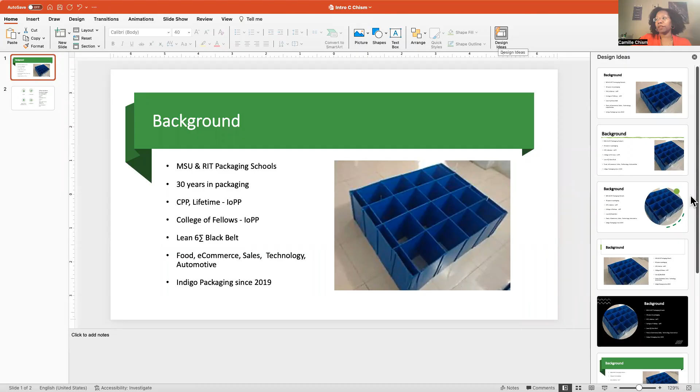You will see on my screen a little bit about my background. I want to introduce myself to you all. I went to Michigan State for my undergrad and also went to RIT for packaging, and I have over 30 years of experience in the packaging industry. I've worked in food, pharma, distribution, sales, computers, automotive, a little bit of everything. I am certified with IOPP as a certified packaging professional. I was inducted into the College of Fellows with Institute of Packaging Professionals, so I hope you all are involved with that. I have done things like receive my Lean Six Sigma Black Belt, value stream mapping, things like that related to automotive packaging. And I own my own packaging firm, so I work a lot with automotive. So this is perfect. I am looking forward to sharing all of my experience with you and sharing some of the best practices for automotive packaging.

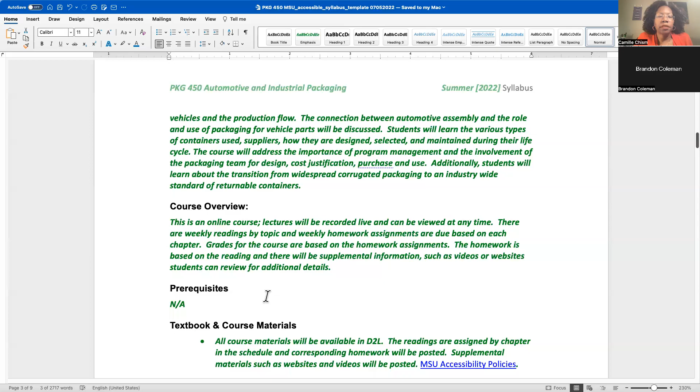The homework is based on the reading assignment, so the chapters that you have that are posted in D2L are what the homework is based on.

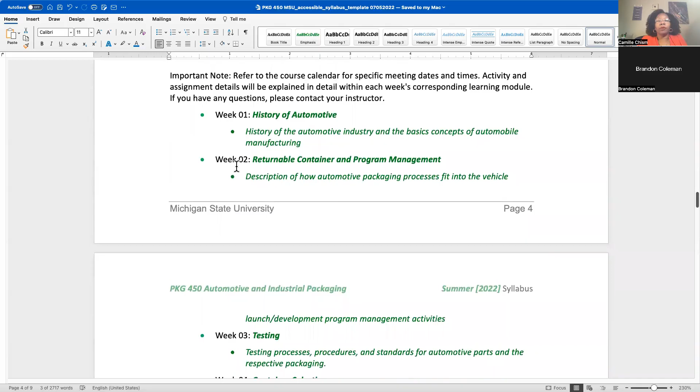As far as the schedule, it's going to go week by week, each chapter being the next week. So the first week, we're talking a little bit about the history and background of automotive.

Next week, we're going to dig into returnable containers and program management, and how packaging ties into the vehicle launch process. The following week, we'll talk about the importance of testing and the role testing plays in packaging design.

And even part approval, because the whole process of approving parts usually has, at the very least, a checkbox somewhere that says packaging has been completed and approved.

So you want to make sure your packaging has been designed, reviewed, tested, and approved before the quality team comes by and does that check mark, because once that happens, you may be stuck with the packaging and then you're fighting fires for years on a specific pack.

Week 4, we're going to talk about container selection, understanding for different vehicle parts what type of protection is needed, and then what some of those traditional packs are in automotive for those parts. And then there are ways to estimate the size of the pack, what's the best size to use. Are you going to ship something in a bulk pack like this, or in a tray that holds parts? Are you going to use an expendable pallet that you can get rid of, or use a returnable pallet? So those are some of the things we'll talk about.

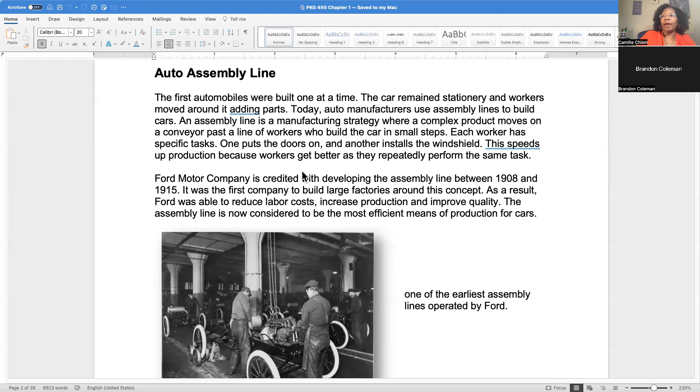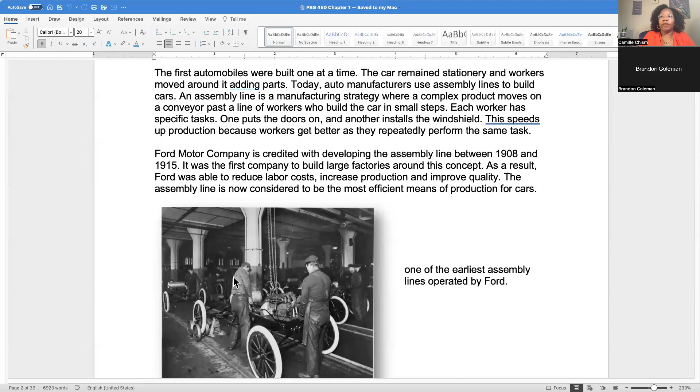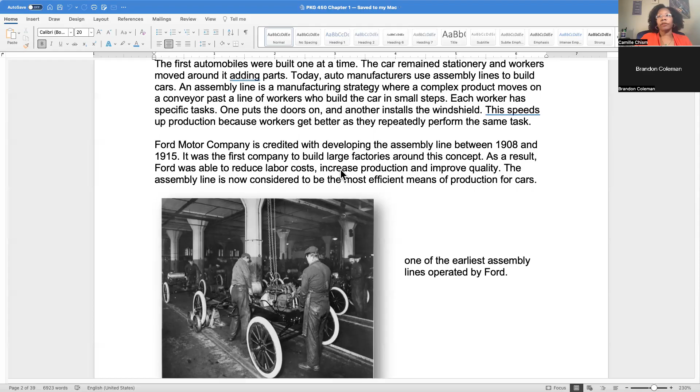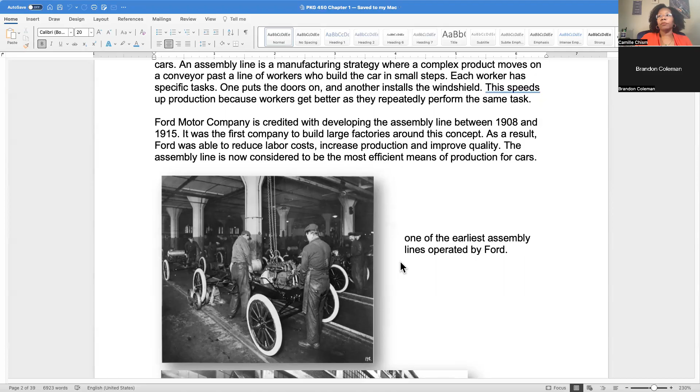Whereas before, if you had something where people were building that, they'd have to go get the windshield, put it on, put each window or each door on separately. You'll see this line here - it looks old-fashioned, but this was actually the beginning of an example of where Ford started to automate the line, move the vehicle down the line, and have people specializing in what they're doing. The Ford company is credited with this. This was a major, revolutionary change in automotive, and not just automotive - other modes of manufacturing and other industries adopted the same process. Rather than having a workshop, they turned things into an assembly line with stations to build, and the product or part moved through that manufacturing process versus building one thing at a time in one spot. So that was revolutionary, not just to automotive, but to manufacturing. I'd say it was a new step in the Industrial Revolution that helped move things along even more. Okay, here's an example - I think all these pictures are from the Rouge plant in Dearborn.

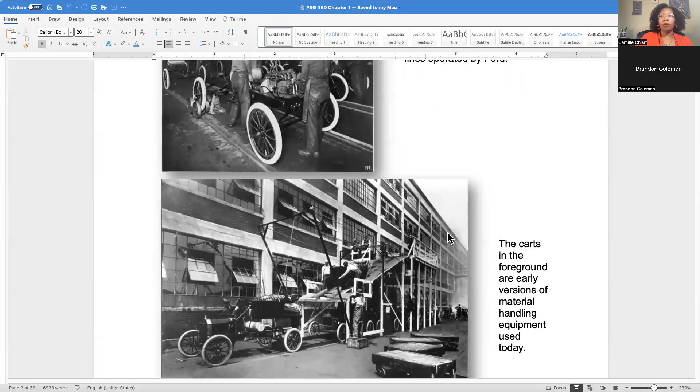So you can see this picture, very old, but you can see the vehicle coming out. This looks like maybe a Model T - I think it's a Model T. This was one of the first vehicle lines that Ford built, the Model T line. But you'll see over here that these carts don't really look that different from what you see in the manufacturing processes today in automotive.

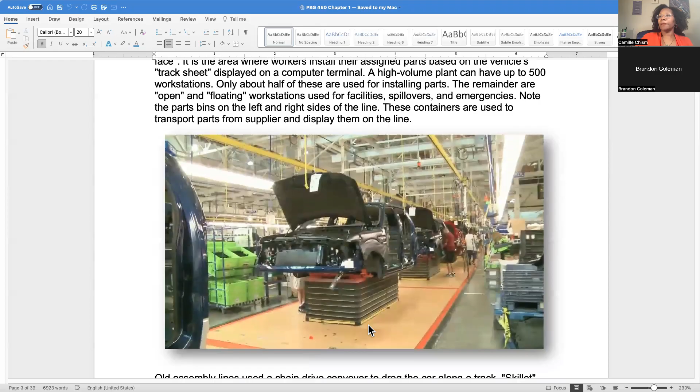Okay, so here's a modern assembly line. While you don't see these carts here this close, I'll tell you they're back here outside of the line of sight. One of the big changes you see now is that all the packaging is right at the line so the operator can reach it. We'll talk about that later.

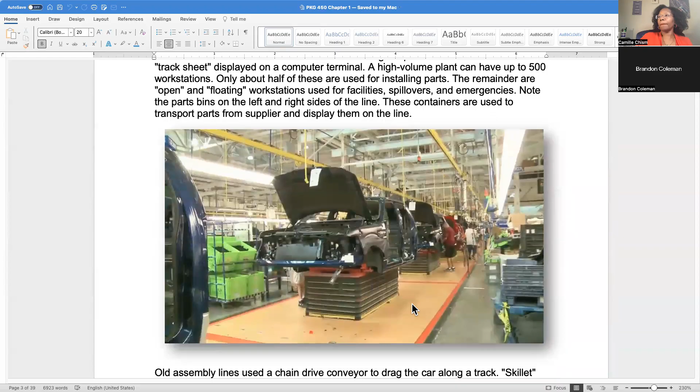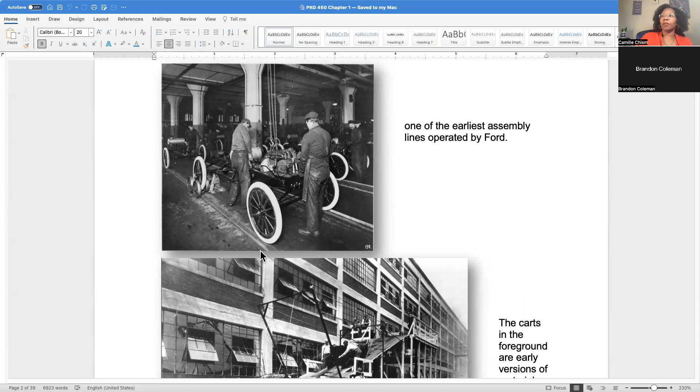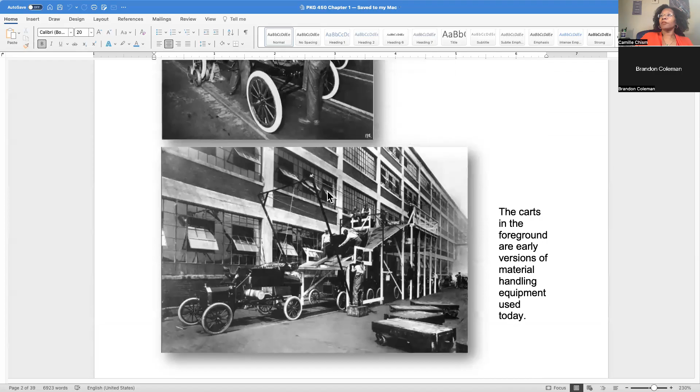So you'll see here in these two lines, the people are standing around and then they push the vehicle forward. You can see the cars on a roller system and they can roll it through here, and same thing at the end of the line - they're bringing it off a ramp. So they're basically working from the floor. But you'll notice now the newer lines, everything's on a plate. So if there's something wrong with this vehicle, depending on the manufacturer and the line, in some areas they could take this whole plate out and move it out if there's an issue, or they can just take the vehicle out and keep everything else moving.

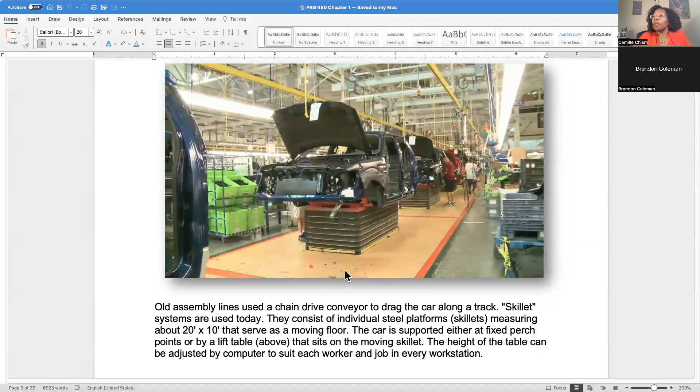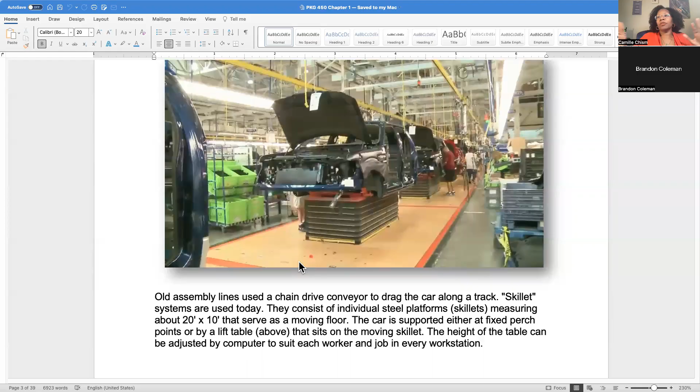But the old lines had some kind of chain, like a conveyor system, that would pull the car along. Now this system is called a skillet - it's like the plate, where they can take that whole 20-foot by 10-foot plate out, or just move and do all the work on that in that one cell.

And we'll talk later about material handling equipment. This one is used for cars, but depending on the station, it can lift up or down. So if someone's working on something like the sunroof, that material handling equipment will move down so the operator can get on top of the car. But if they're installing something lower, like a floorboard, or something underneath or at the base, that material handling system will lift up and then they can install from the bottom. The whole goal is to keep the operator standing pretty much in the very similar position.

They're not taking a lot of steps, because the more steps they take, the longer and more time it cuts out of their day, and they can do less work. So the whole process is to keep them standing in the same position, and they're not really moving a whole lot. That's why it's important.

They can move the car up and down, and you can see the packaging in the background that they can actually pull those parts out. At this station, the vehicle's up relatively high, and you'll see the bins, those bright green bins in the background, are also pretty high, which means the operator is going to be reaching for them. It's very easy for them to just reach and grab, and they're not struggling or straining - not bending down, not climbing up something. Pretty much everything's all at the same level.

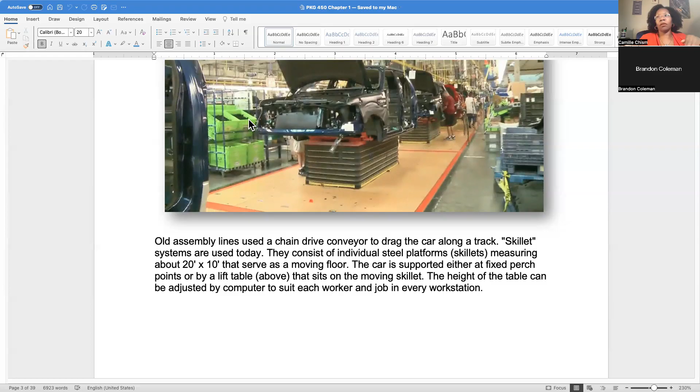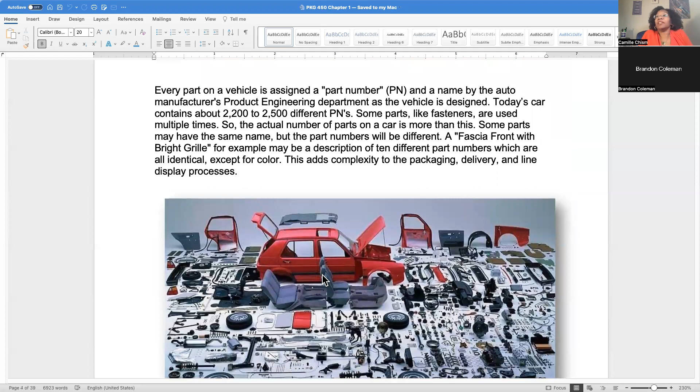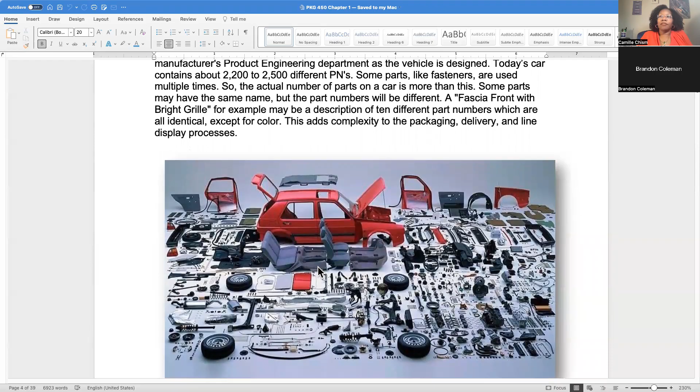Okay, this is interesting. If you were to take a vehicle apart, you would see a couple thousand parts for every single vehicle. I've worked in automotive seating, and for these seats you're going to have anywhere between 300 and 500 parts alone just for the seat. I worked for an engine plant, and they had hundreds of parts for the engine easily. So you can just see how many parts there are, and that includes every single part.

Like here, you can see these are fasteners and washers. Every screw, everything is counted and used and has a part number. You could use the same screw, same supplier, but the screw or fastener used for the steering wheel may have a different part number. That's something to keep in mind, because the part number can affect the packaging even if it's the same part, since the part number may be driven by a different quantity. So here you might be using 8 of these fasteners, here you might only be using 2, and over here you might be using 20. That's going to affect the type of packaging you select for that part.

Another thing to look out for: you might have 10 part numbers, but the color's different. So with things like seating, doors, cup holders, armrests, those might all be different colors. Or you might have what's called a left-hand part or a right-hand part, like a left-hand door handle and a right-hand door handle. They look exactly the same, except they're mirror images of each other.

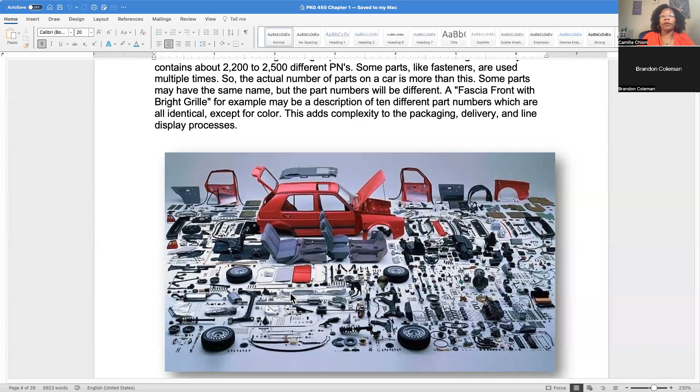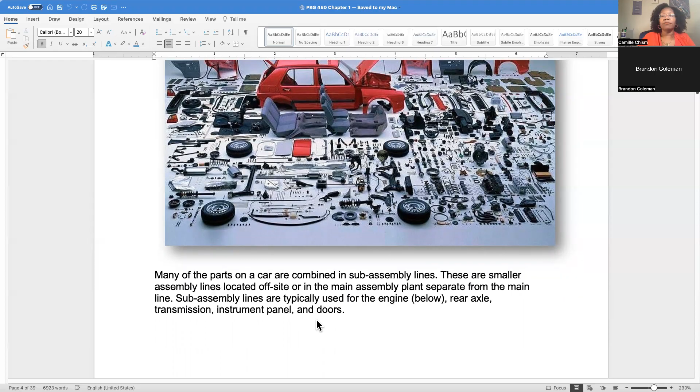You have to be aware of that too. You might have something that's low use - let's say you have a yellow door, a yellow car. You're not going to sell that many yellow cars, but if they sell that car in red, you might sell like 1,000 times more. That's going to impact the type of packaging you select for those. But it also gets tied into the room that's allocated on a production line, so there are a lot of different things to take into consideration.

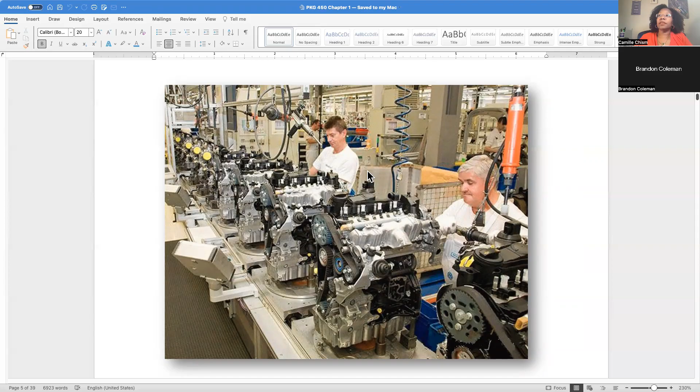Here you can see another example of the packaging line side. So you'll hear comments like line side packaging - packaging that is made to fit right near the operator when they work, so that they don't have to go walking and getting packaging. You'll actually hear about this a little bit in the video history.

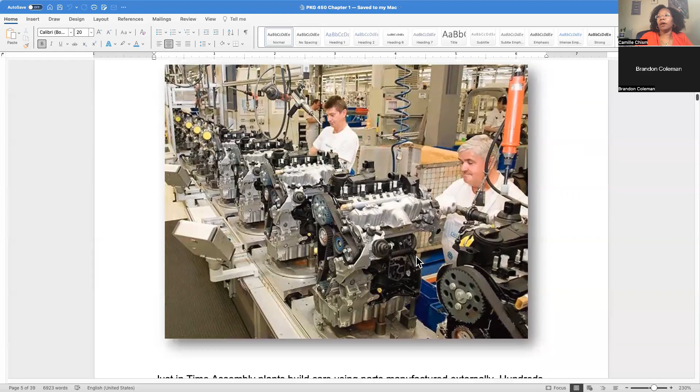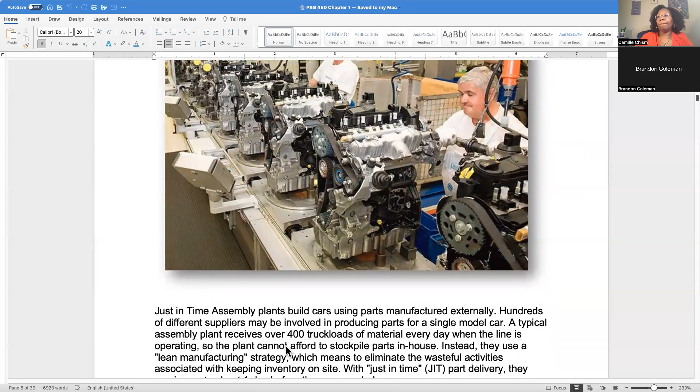This is an example of a just-in-time assembly plant, so we'll talk about that as well. These parts are ordered by - for example, when I worked in the seating plant, the plant was down the street, 5 minutes away from the OEM. The OEM, the original equipment manufacturer, would be what we consider the big three, like Chrysler, which is now Stellantis, Ford, General Motors, but it could be Toyota, Honda, any of the vehicle manufacturers. They're considered the OEM.

They could put in an order to their parts supplier depending on how they're setting up. If they're more of a lean manufacturing company following Toyota principles, they could get an order that says our customer down the road 5 minutes away wants 50 of the black doors today and only 5 of the yellow doors. Every day they've been ordering 50 black doors and 5 yellow doors, very low volume on the yellow. But then maybe they get an order from Yellow Cab to buy vehicles, so now they might decide to order 100 yellow doors instead of 5 or 10.

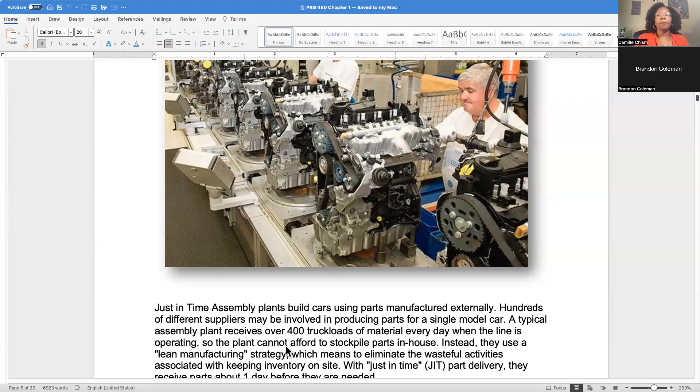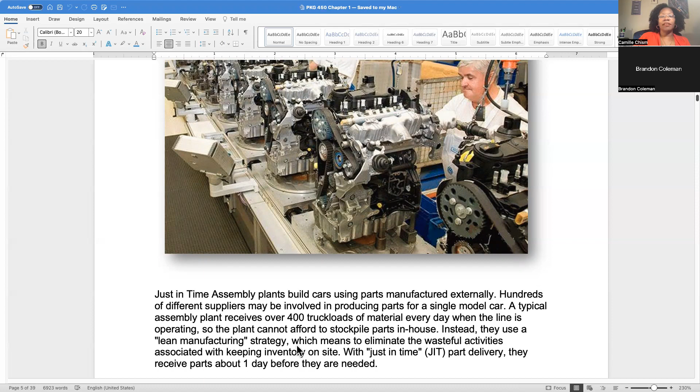So just-in-time is efficient for the OEMs and even the larger manufacturers, like the tier ones supplying to the OEMs. For larger companies like the tier ones or OEMs, just-in-time works well because they get what they need when they need it. The further down you go downstream for the suppliers, it becomes much more challenging for them.

In order to do that, here's where lean manufacturing comes in. You heard me mention steps and why it's important for the operator to stay in the same spot. In the automotive world, and you'll see this in other manufacturing facilities too, they may do a time study, but in lean manufacturing they may not do a time study.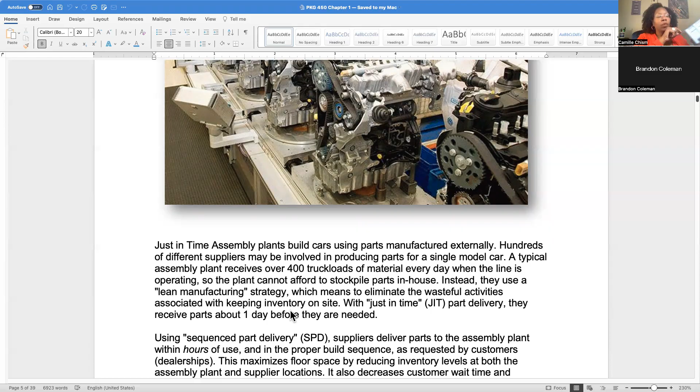They will do things like a spaghetti chart, or count the steps, and watch an operator all day. There are operators at the line pulling parts from the bin, standing in one place, able to pull those parts. But there may be one station where the operator has to walk around, get parts, and come back, and they see them doing this 20 times a day. That's a red flag that they need to implement more lean manufacturing processes to make it easier for the operator to get these parts.

The reason that's important is because if they get an order where they suddenly go from 5 to 100, they've got to have very streamlined processes so they can switch without focusing on picking things up and walking down the aisle to get parts. They'll be set up so that once they've switched over to yellow, the operators and the people delivering to them get a signal showing them they need to go get yellow parts right now.

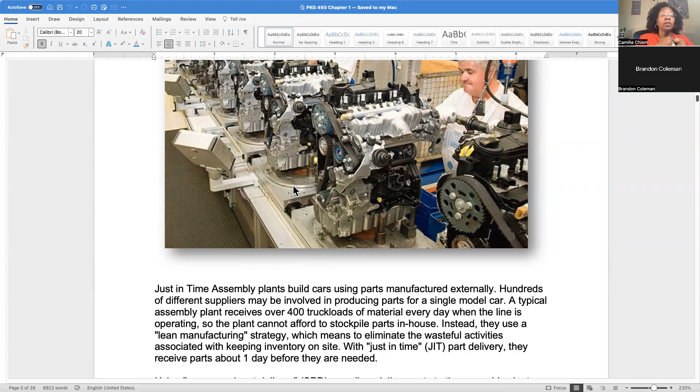So right here, where I was showing you this monitor, this could be telling them how many parts they've done. But if there's a very quick switchover for just-in-time from the black doors to the yellow doors, they might get a notification on there. So they're not going to build 10 more black doors — they're going to stop, and they should be able to turn around and grab their part, or it should be right at the line.

You'll see right here, this looks like some blue bins — these bins might hold parts. So if they're changing something, there will be people assigned to deliver parts on time. If they get that just-in-time order change, technically the operators building the parts shouldn't have to stop what they're doing. Those parts should be coming right to the line in the right packaging, and they can just continue to work. The next part they pull should be the right part, so it eliminates a lot of that delay.

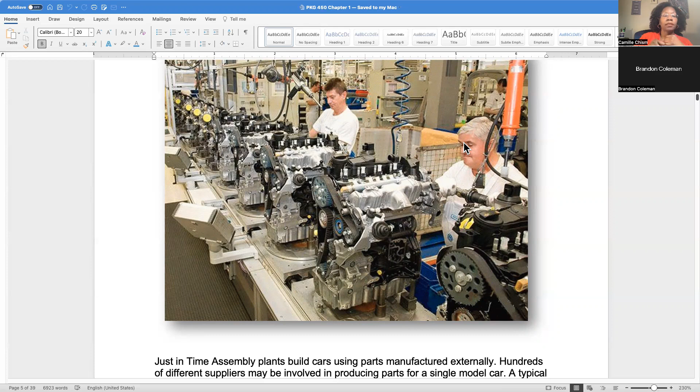Their job is to install the part on the door or the engine or whatever that part is — that's their job. And there are other people whose role is to make sure the right part is there at the right time. That's part of where they talk about eliminating wasteful activities with just-in-time delivery. Traditionally, we talk about receiving parts about a day before they're needed.

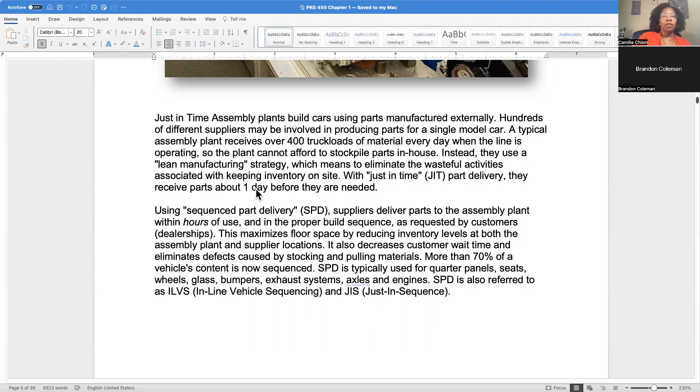Some of the OEMs are very demanding, and they might give what's called a signal or a change in order an hour, 2 or 3 hours ahead of when they need it. So in general, they try to have a day's worth of parts in before, so they can accommodate changes, but some customers are very demanding. You have to understand what the suppliers require in automotive. When I worked for seats, some companies were fine with having a day's worth of parts ahead of time, some needed 5 days ahead, and some needed to be able to switch up an hour ahead of time. So it really depended on that supplier and who their customers were.

I just talked about the operator at the line who's installing a part. Their job is to install the part, and they shouldn't have to worry about whether the right thing is there. They will have ways to check. With lean manufacturing, they'll have things they can check, things they can look at—visual management, where they might have a screen that flashes to tell them something's about to change, or a different colored flag that comes up. They'll have some way to know, just in case this didn't happen, they're letting you know it should happen. But in general, they shouldn't have to worry about that.

That's because of what's called sequence part delivery. The parts get delivered where they need to be, when they need to be delivered. This gives an example of dealerships, but in automotive manufacturing, many times it could be your vehicle OEM asking for a request for orders very quickly. This helps reduce errors, because they're not worrying about making 1,000 doors, and you're so busy making 1,000 black doors. All of a sudden, when the machine says yellow, they just keep making black doors, and now they've made 300 too many. Now what do you do? But when things are sequenced, the order of what's needed is listed from a computer, or the operators get parts delivered in the order they need.

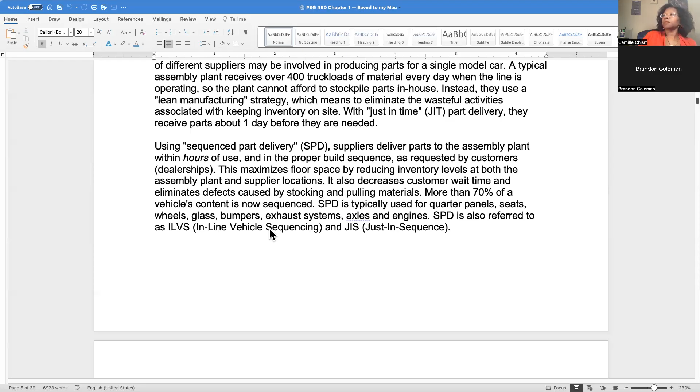This kind of goes into some of the things I talked about. I just gave some examples of communication—communication via electronic notification, paper communication, and also visual communication, where I mentioned visual management, like seeing a red light flashing on the screen to say we have an error, something's wrong, or we've changed something, or we're getting ready to do a changeover on the line to do something different. It also helps them by being able to trace things.

I mentioned the sound system before. If they find out the sound system changed, or there's a recall, or as we know with the pandemic and the chip shortages, maybe you have a group of vehicles where components were put in but they don't have the right chip, or they don't have a chip at all. With the communication systems they have, they can actually separate those out, build everything else they need, and flag them so they don't get shipped out, as they would otherwise just come right off the line and get put in the truck.

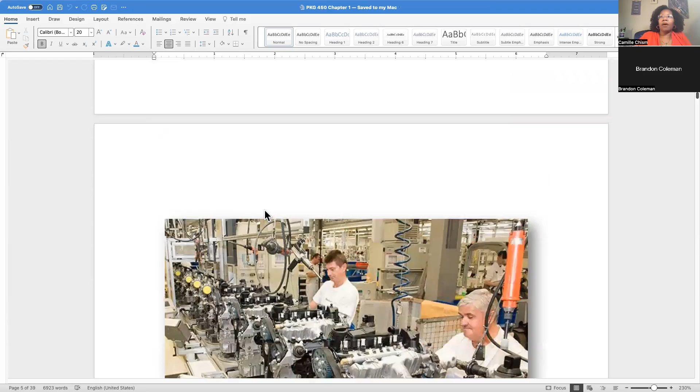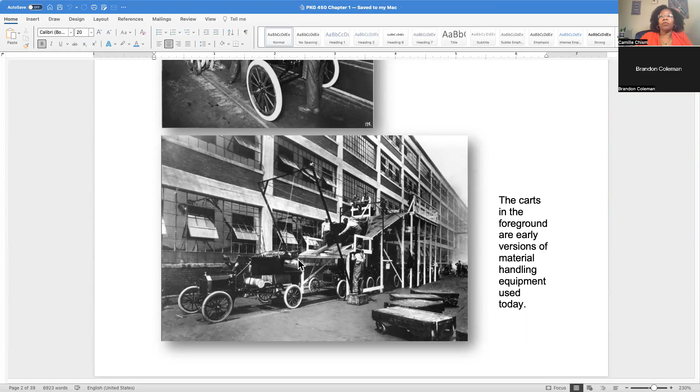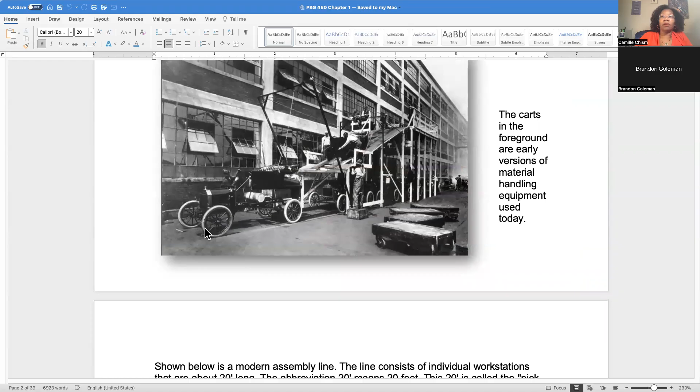If you compare what I'm saying now with older systems, if something went wrong, you wouldn't necessarily know how to find it. It might take a while, because now they've got to go find those vehicles. They may be parked in a lot somewhere, and they've got to physically walk over there and go through paperwork to find it. It's going to take a lot longer, and they may not find it until it's gone to the customer, or it's parked out somewhere before the customer gets it. But with current processes like this, they can actually find those things and pull them before they even get out the door, before they even get off the line.

Okay, so a lot of this that we're seeing is talking about how a high volume assembly plant can produce about 72 cars per hour. So that's more than one a minute, right?

I'm gonna date myself, but when I was a kid, my father would take us out to vehicle plants on Saturday mornings for fun. It was very slow moving. Now you can walk across the line when the vehicles are moving, but you've got to really watch, the vehicle might come at you. Back then, even though they had the production line, it wasn't that fast. People walked back and forth in between to get parts, and it wasn't as fast moving as it is now.

But again, you look at the volume, it's considered high volume. They're doing 72 an hour. Some of the suppliers, like when I worked for an engine plant, they could make 1,000 engines a day. They're supplying multiple plants, not just making 72 an hour for one vehicle or one plant. They're making it for multiple types of vehicles.

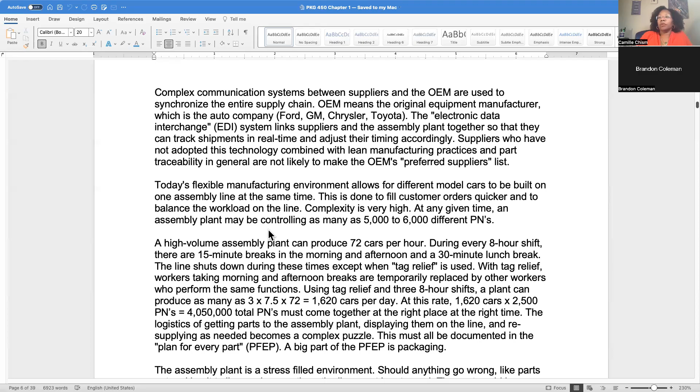So this gives you an idea of how you can maximize your production. With this part here is a pretty good calculation of how many cars they can do a day. So here they're doing a little bit over 1,600 cars per day, and that's including things like breaks, people covering for breaks, lunch breaks, any maintenance.

Keep this in mind, when you're determining how many packages you need, when we get to the returnable portion, if you're working in automotive packaging, once you start working you also want to understand how much downtime they have. Downtime could be breakdowns, downtime could be breaks, but downtime could also be what's called PM, or preventive maintenance, so they can plan for replacing bearings or lubricating something. Those things are planned, so they will have a planned shutdown on the line, and you have to take that out. That would impact how big your packaging is, how many parts you need in a pack, how many packs you're going to buy. So just keep that in mind.

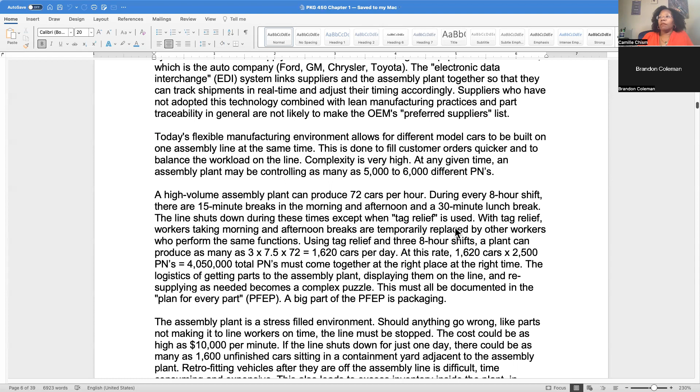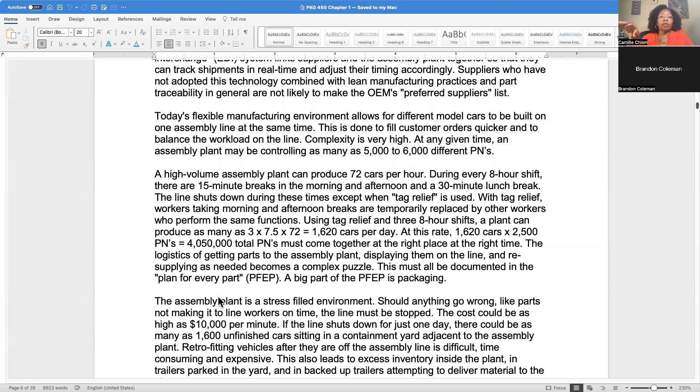You want to understand all this so that you can really know what type of packaging works best for your line. Is it high speed or low speed? Is it bulk, are you going to be using a bulk bin like this? Or are you going to be using a small tray that carries a bunch of parts like that? Knowing things like the breakdown, how many parts can be made on a particular line, as well as what the demand is of that line, is really important.

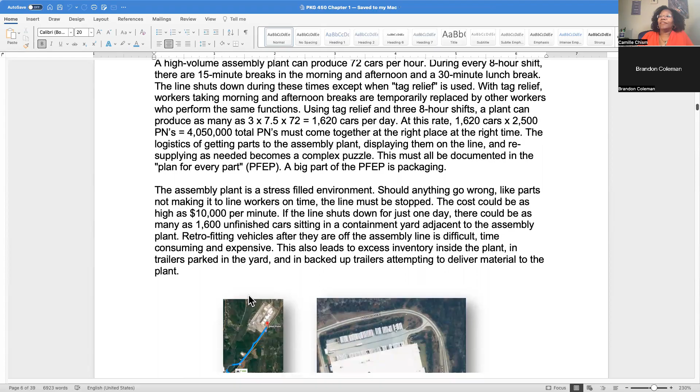Okay, so remember I mentioned before about the assembly line being a stress-filled environment, where you don't want to shut the line down. That's kind of what that means. If you shut the line down, you can see here the cost is $10,000 per minute. So no one in the automotive plant ever wants to be the reason why the plant was shut down.

I've worked in plants where they have helicoptered parts in. They can't find the parts, so they'll hire a helicopter to bring the parts in. Now you don't want to do that, that's a really last minute scenario and it's expensive to do that. But they would rather helicopter parts in than shut the line down, because it's so expensive to do it.

I put this picture in here because this talks about how you can either shut the line down if you don't have enough parts, or maybe you end up with too many parts. You got to really know how many you're ordering, because if you have too many parts, then you can have trouble finding them, or it can actually cause a backup.

This picture I put in here because this is a plant that I used to support. You can see this is out, this is all highway, and this is the plant, this is the back of the plant. When you pull into the plant it's very neat now, but I remember coming to this plant, all of these trucks here, these are 53-foot trucks, so the doors are full pretty much.

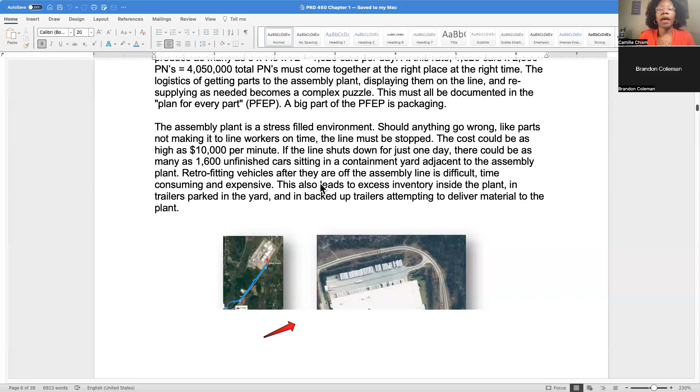Now you have to hire extra staff or bring up extra staff to finish the vehicle, because the people that normally would have finished it are inside finishing new vehicles still on the line. So you have to bring in extra people for that, which can be very expensive. And if you're bringing in people you don't normally bring in, and they're doing the work offline, not in their regular station, they're more prone to errors — there's more chance to have an error by doing that. So a lot of things really lead into and tie into this.

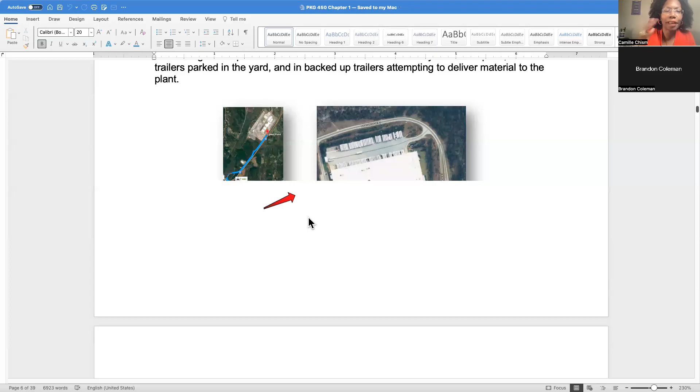It's really interesting — once you start really looking at it, no matter your approach, whether you're in the plant, making food, or at Panera and you see the coffee and creamer need to be flipped around because everyone's walking over each other — it's funny how you have a different viewpoint once you start doing lean. Yeah, most definitely, a whole different mindset.

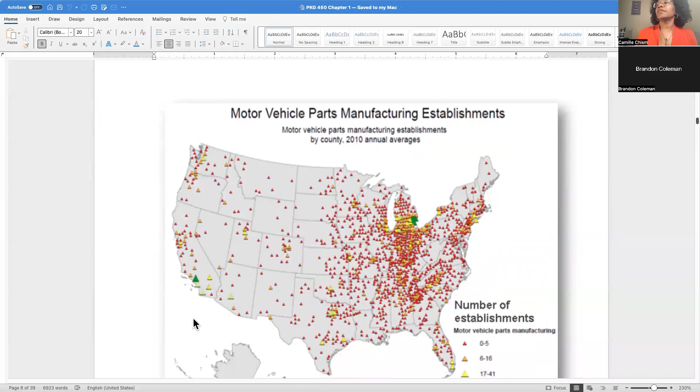Okay, this is a picture of what the suppliers look like. So these are for parts. You can see it's really concentrated here in Detroit, concentrated in Michigan, concentrated in Ohio. You'll notice the concentration goes down I-75. And then you'll notice there's like another concentration that goes along here. This would actually match up with the highway map.

These are some of the original suppliers. There were a lot in New York for a while. There are still quite a few in the New York area. But there is a new concentration in the Southeast, what's called the Southeast Corridor, between like the Carolinas all the way to Alabama. There's a highway here. You can actually see this highway that runs right here.

So one of the key interesting things about having these suppliers on these routes, you'll see they run along highways because it's easier to get to. For example, it's much easier to get up and down I-75 and get parts, even if you're getting all the way down to like Florida or Alabama, than it would be to get parts from North Dakota.

So you've got part suppliers here, but you see they're much more sparse. Much more sparse. But you could probably map some road maps here. I'm pretty sure this is I-80 right here. And then I-10 runs along here.

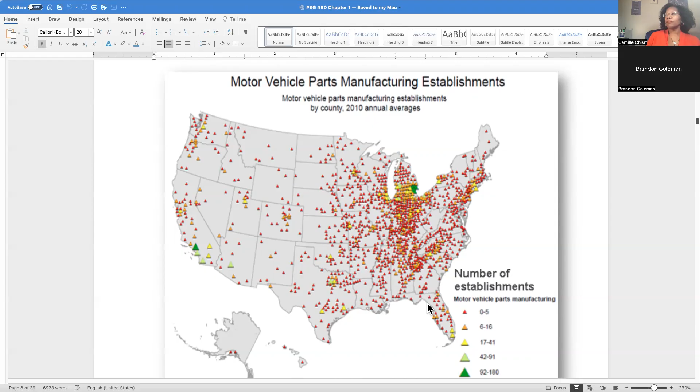But it's strategically done that way because they want to be along highways so that they can distribute the parts and get them to and from their customers faster. And if they're getting parts, because a lot of these companies are feeding. So if you look here, this shows the number of suppliers. So here in Detroit, they've got a whole lot more, and they're probably going to be larger companies.

These companies here that are kind of scattered out through the middle of the US or even up here in the New England area, they are probably smaller suppliers. Might be some kind of custom, or there's some kind of part that they're the only ones that make that part. Same thing here you've got LA.

The reason why you're going to see a concentration here is because maybe there are ports here that are coming from Asia, and a lot of parts are coming from Asia. So they've built locations here that can accept their parts from the port, and maybe they're doing some final assembly. One of the things you'll see in American manufacturing, when they'll say something is made in America, it's usually they get parts from, most of the supplier parts are coming from a lot of the same people. If they're coming from overseas, they'll bring those parts from overseas and then assemble them together.

And then they say that they're made in America, and it might avoid tariffs. It might, for whatever reason, be cheaper. There might be some advantages for them that do it that way. So what you'll see here, like I said, they may not have to go through some of the customs and border paperwork and issues that they might encounter if they had an assembled part that came from overseas. So that's why you also see a proliferation of manufacturers here as well.

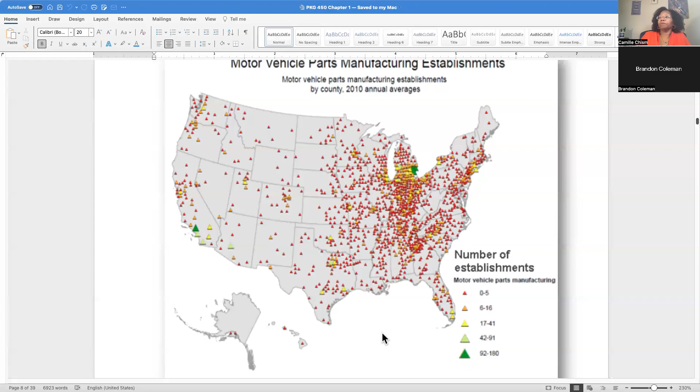Okay, so this here says to share expenses and profits, auto manufacturers engage in partnerships. To an extent, they do that, because a lot of the parts are either very similar or the same.

A perfect example of this would be airbags. I don't know if you remember all these airbag recalls that we've had over the last 5 years. That's because only 1 or 2 companies make the airbags. And the airbags in all these different vehicles that they were having recalls on, they were from one airbag supplier. So even though you're hearing Chrysler, Toyota, Ford, whoever it was, you were hearing the different companies, but the airbags were all coming from the same supplier.

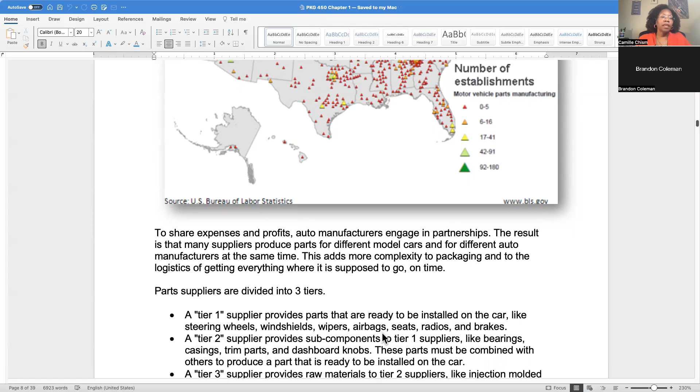So a lot of that is what you're seeing. And it helps them to save money because now they're ordering the same part or very similar part. Things like the wire harnesses that are used for the electronic components in the vehicle behind the dashboard - a lot of those are very similar. They're coming from 1 or 2 suppliers.

Things like a cup holder or a DVD player - the DVD players may all have the same screen size. Those screens may all be the same, but the outer fascia of that or how it hooks onto the seat may be a little bit different, but they're able to share expenses by doing that or save money or get a better price because now everybody's getting that screen or very similar screen in bulk. So that's just an example. I don't know if that's a real case, but it's an example of things you'll see a lot in automotive.

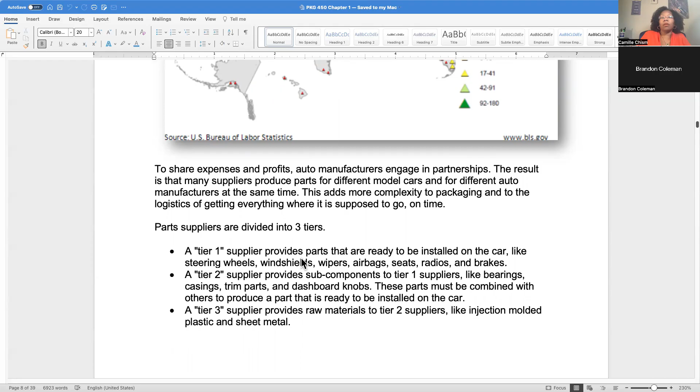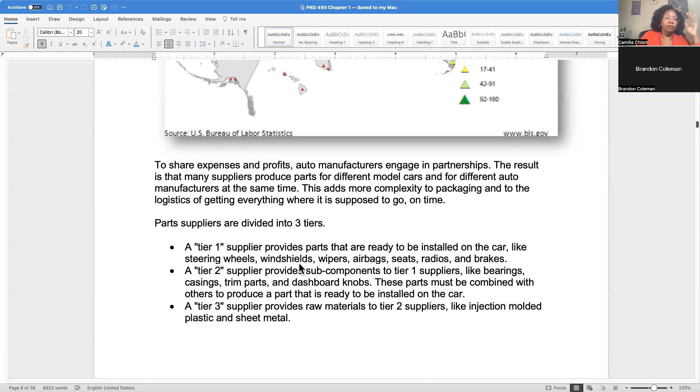When I worked for the seating manufacturer, they might use a very similar frame or the post for the headrest for the vehicles. Those posts were all very similar, or the clips on it were very similar, no matter what the vehicle. If you look at different vehicles, you'll see things that look the same, and if you really do some research, you'll find out they're made by the same company. This is very similar to what you would see with private labeling with food, where it's the same food, same formula almost exactly, and they just put them in a different carton with a different logo on it. So that is the thought process they're using to save money.

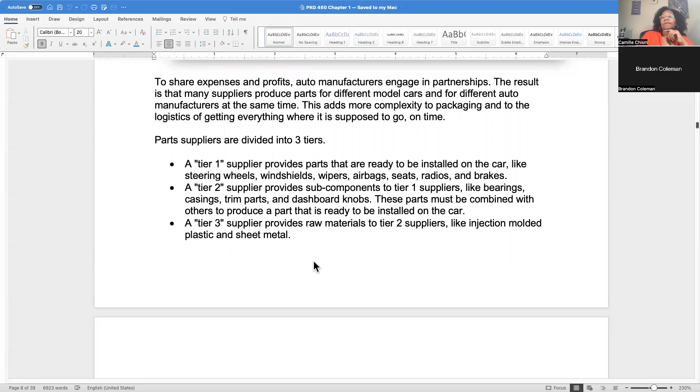Let's see, I touched a little bit upon the tiers. So I already mentioned OEM would be the original equipment manufacturer that makes the vehicle. But then you've got tier ones, and they are the ones that supply directly to the vehicle manufacturers. So here it gives you examples of windshield wipers. I mentioned the engine, seats - those things are being made and sent directly to the OEM, to the automotive plant.

Tier 2, they are providing their supplies to the tier 1s. So an example of that would be, when I worked for seating, frames - the metal frames inside of the seat, or the cushion that goes on top of the metal frame. Those things, the clips that go on the headrest, or even the post, the pins used to adjust the height of your headrest, those would come from another supplier. And then let's say a mirror - you have the mirror that can change from day to night vision, or maybe you have the system where you can call for an emergency on your mirror.

Tier one would be providing that mirror to the vehicle company. Tier two might be providing the actual mirror and the outer casing. Those suppliers would be supplying those separate parts. But then a tier three supplier might be the company that is providing the plastic for the outer casing that's being injection molded, for example.

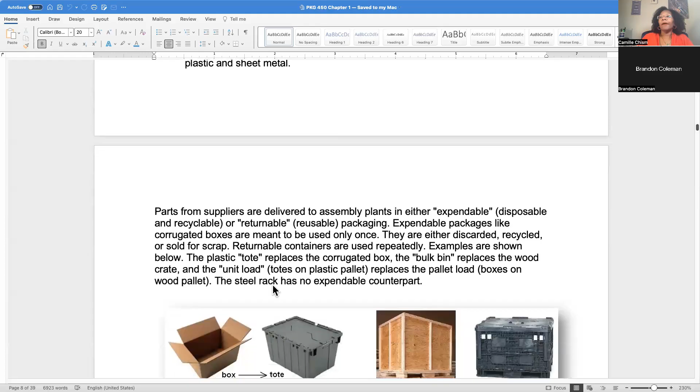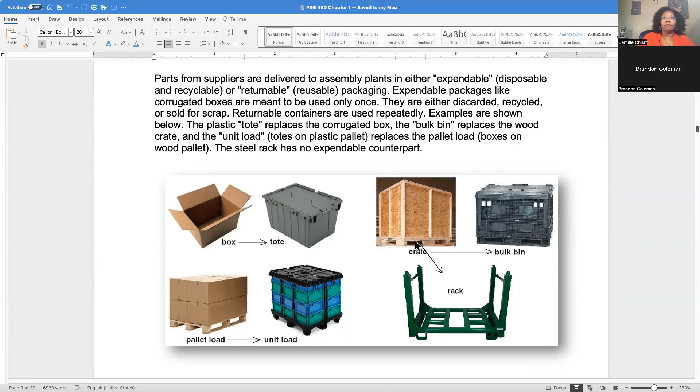Okay, this is touching on expendable versus returnable. So here are some examples. I gave you that one already. You've got a box versus a tote. You've got a crate versus a bulk bin, or a crate versus a rack. Some companies do try to reuse crates, but I personally wouldn't necessarily recommend that, because crates can be really difficult to build, and they can be really difficult to disassemble and break apart and take the part out. And if you've got a crate that is easy to take apart, it's probably not going to be very robust if you reuse it multiple times.

Here's an example of boxes in what's a pallet load, or a unit load of the returnable totes that go on a pallet. So in my example, you've got the pallet here, returnable pallet. You've got these trays that might go inside of a bin, and then this bin is a bulk bin, so it could be picked up by a pallet and moved. But sometimes you'll have smaller totes, and those parts might go into the tote that way.

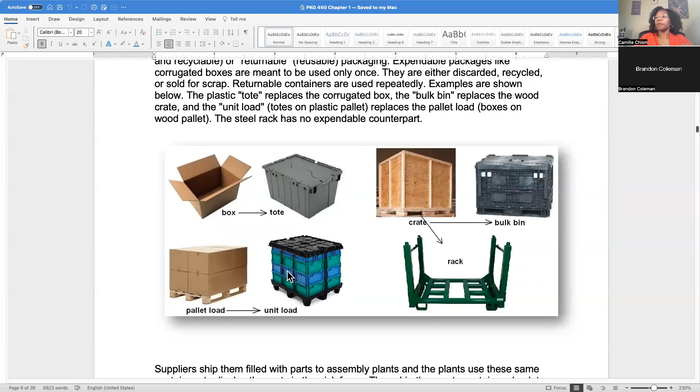One of the things about automotive packaging is that the packaging is used, and you probably noticed in some of these pictures as we went through the line. One of the things that's really important about automotive packaging is that it's used by the operator or the assembler in the manufacturing plant. It holds the part, so they can reach it very easily. It's used to store, not only to protect or transport, but also for them to pick the part from the packaging. And it increases the speed for their assembly, because they don't have to go find the part, dig it out of the package, put the package back down, and then take that part over to the line.

This pack is generally going to be right at the line. The operator can just grab what they need. And then when this is empty, someone shows up and takes it away. They may have somewhere where they set it down so people know it's empty, or they might have a flagging system to indicate it's empty, but they don't have to call and wait for someone to come get it. It will either be in a designated spot, or they have some system for people to know that it's empty and to get it out of the way and bring more.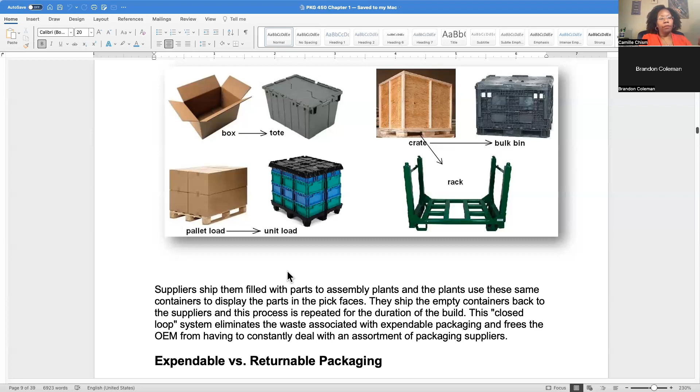So I mentioned how these get filled at the supplier and go to the customer or assembly plant, whoever is using those parts. When it's empty, someone comes and gets it, and since it's a reusable pack, it gets put back on a truck and sent back to whoever originally put the parts in there. So it comes back empty, they fill it up again and ship it, and that whole cycle repeats.

That is what's called a closed loop. There are a lot of ways to do that. It could be direct from A to B, or A, B, C, or A through E, running in a circle all day. There are many different ways to do it, but it was done to get rid of waste. You'll see in the video later what it was like before and after.

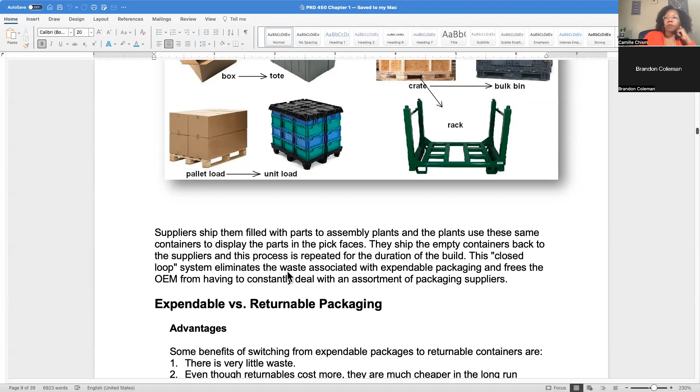It really helped eliminate a lot of waste in the plants and save money. Okay, so I'm going to talk a little bit about expendable versus returnable packaging. Any questions, Brandon, before I go further? Nope, I'm all good.

Okay, so advantages of switching. If you're switching from the expendable pack to a returnable pack, the first thing, as I mentioned before, is not much waste, right?

The second thing is, when you look at the price, this might be $10, this might be $100 or $50 or whatever it is. It's going to cost a lot more. However, we'll do the return on investment calculator later, and you're going to see that over the period of time you're using these, it's going to cost a lot less than this in most cases. There may be some exceptions, but in general, if you have higher volume and do the calculations, you will see it costs a lot less to use a returnable pack versus an expendable pack.

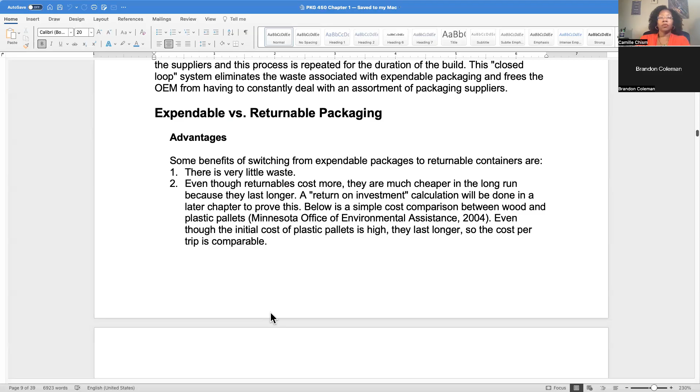If you have something prone to getting crushed, the compression strength on this - again this is 1/10 of the scale of this container - but the compression strength on a full-size container like this versus a box is going to be superior. So if you're looking for something that can't be crushed, you'd definitely want to consider a returnable pack that is more robust, with a higher compression strength.

Here I tried to update this. This shows some different pallets. So I mentioned if you have a hardwood like an oak pallet, brand new versus pine versus plastic, you see the difference in cost. You can range anywhere from $20 to $100.

I don't know what the pricing is now, but when I worked for one of the automotive companies, their purchasing company had somehow worked out they were paying like $5 a pallet. I'm sure their price is at least double by now, but they were paying way less than most companies because they were buying so many pallets - that's for their wood pallets. For their plastic pallets, they were probably paying like $50. So they were getting a really good deal.

As prices went up, they were making their suppliers absorb or lose the profit, whatever profit they had - they were paying the difference. If you look at the life of these, if you refurbish a wood pallet, it could be $15. Wood pallets aren't necessarily as robust, and if you're shipping them overseas, sometimes there are issues with certain stamps to make sure they're not contaminated with bugs.

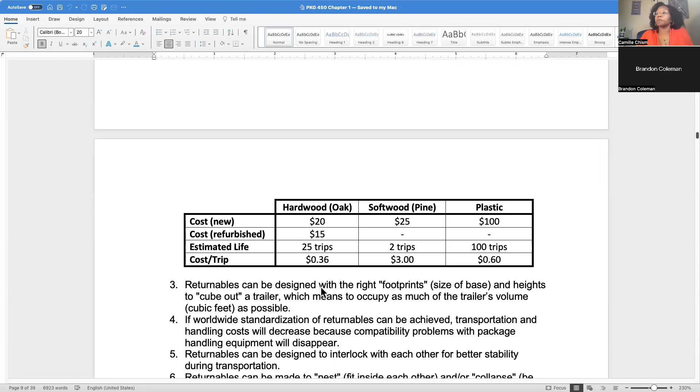Another advantage of returnables is that they are standardized. So you have standard packs and standard pallets, and they're going to fit together. When you have these standards, you can start planning—okay, I know this is always going to go in a 12-inch by 15-inch tote. That's going to be your footprint here.

I'm going to use this as an example with these trays. If they use a standard automotive pallet and put this tray on it—I'll do it this way so you can see—these are 2 across, and you can see there's overhang. Or if they just use 1, it's not going to fill up the whole pallet. You're not going to get that many on this pallet. It fills up, but you can only get 2 of these on a pallet.

Versus if you were to cut this tray and make it 1 row shorter, you could get 2 of these side by side and fit 4 of these trays on a pallet instead of 2. You get 2 of these on this side without any overhang. But if you put 2, you're going to get overhang on 2 by 2. If you put 4, you're going to get some overhang. So those are some things you want to keep in mind.

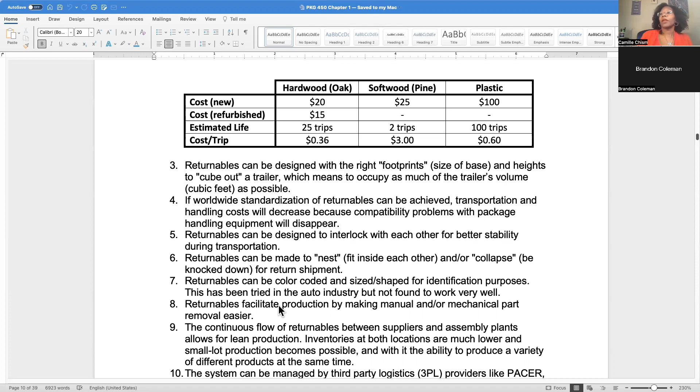So if you ever walk into a plant and see every single color of packaging you can imagine, that usually tells you they probably need to work on their processes and training of the people in their plant. And sometimes your supplier, just to be safe, will ask for extra packaging so they don't ever run out. And then what they'll do is build the parts, put them in the packaging, and store it. So they're basically taking someone else's containers.

But we'll talk about that later. Let's see.

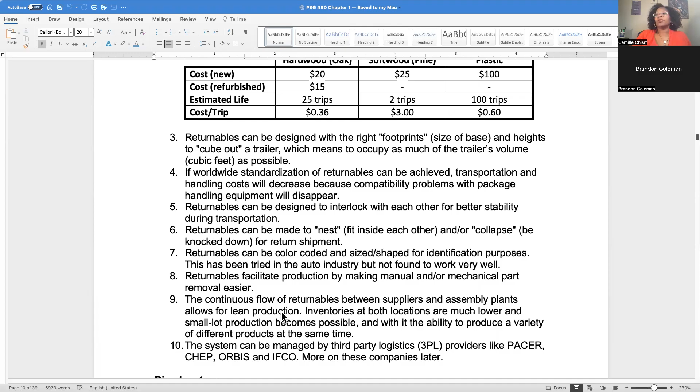Returnables are good because they help with taking the part out, since they can be designed to hold the part. This has a tray that fits parts in it, and that helps because now they're oriented the same way.

If the part needs to go into the vehicle the same exact way, they just pick it up out of the tray and it fits right in, in the correct orientation. Versus if they didn't have a tray and it just got put into a bin in any direction, now the operator has to pick it up, look at it, orient it, and put it in.

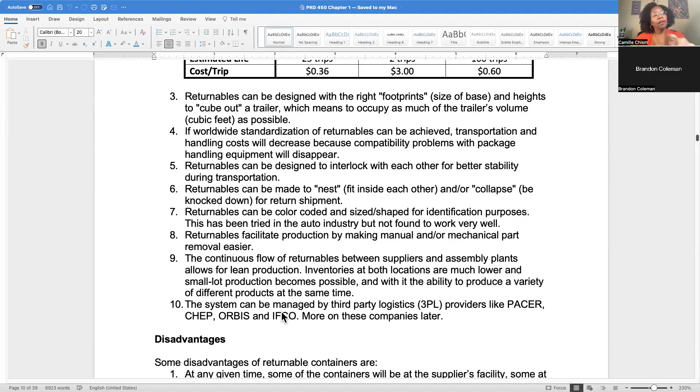We talk about lean production and having this flow of containers being picked up and delivered to them, the right amount at the right time to the right place. That's something you can do really well with returnables if you set your processes up right.

Number 10 is listed as an advantage: that you can manage your containers by third-party logistics, which I've seen work really well.

When we get to the topic of rentals, I'll tell you what the theory is, but then I'll also tell you my personal experience and opinion about some of these companies.

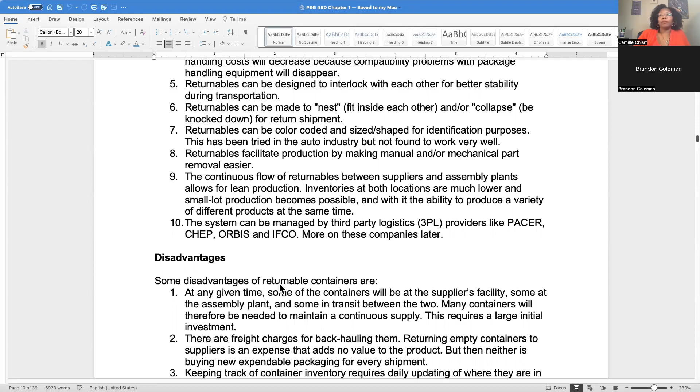Now for disadvantages: containers can be sitting someplace and we don't know where. I showed you that picture of the plant where, when they're backed up, the trucks wrap all the way around the building. That's all going to be holding parts in packaging. Once that backup occurs, the people putting parts into packaging to ship to that plant will eventually run out of packaging, so keeping that flow going is important.

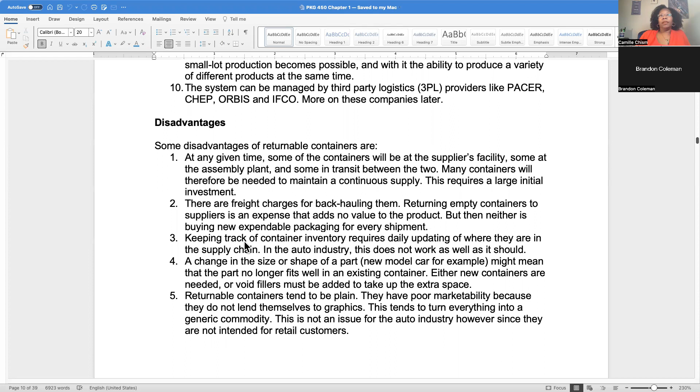You've got to know how many you need and what could go wrong, understanding your process and what's slow in order to do that well. Nobody wants to ship a truck full of empty packaging anywhere because it's expensive and doesn't add value, but in the long run it can be cheaper than buying expendable packaging over and over again.

Keeping track of container inventory—I already talked about how, if you do it well, everyone knows where the blue bins go and where the pink bins go. But if you don't do it well, who knows where they're going? They literally go everywhere if you go into an automotive plant.

You may not have noticed this before, but you will now: you'll see containers that all look the same, like a green tote, but when you look closely it'll say Toyota, Honda, GM, Denso—all the suppliers, OEMs and suppliers. You'll see different names on them because over time they've gotten mixed up.

If you change the part, it may not fit the container. This is true not only for shipping parts into assembly plants or between suppliers, but I've seen this happen with finished vehicles going out the door too.

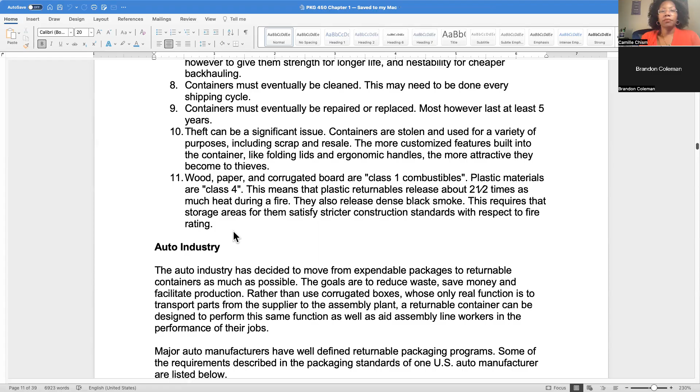Okay, we're getting close to time, so I'll finish this later. Tomorrow we'll talk about how the auto industry has decided to move from expendable packages to returnable ones as much as possible. This has been going on since the 80s, it's pretty standard, but lately people have tried to get away from it because they hate plastic. Once they start running the numbers, the finance team says, no, we're using plastic, because you can reuse them. We'll talk about some of the sustainable things people are looking at to help with the automotive industry. I'll make sure you guys get that reading because I think it's really interesting.

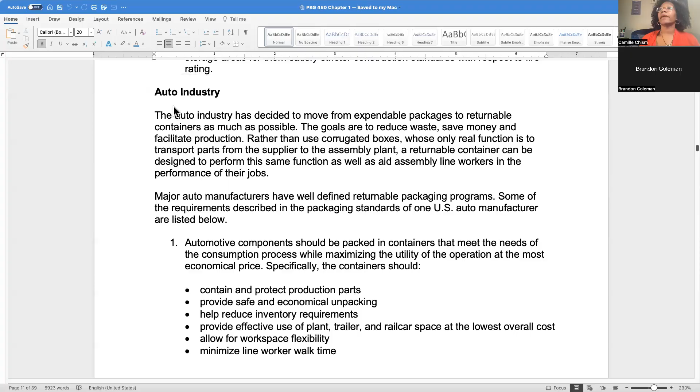Okay, so I think for number 10 you're going to have two videos about the Rouge River assembly plant. One is listed in the verbiage that's in chapter 1, but at the very end I put a link to a full video of that, so I'll double check that and clarify it. But yeah, if you can answer this in either Word or Excel, I think generally most of these you can answer with Word, typing into Word and just submit your answers via D2L. If you have any questions before you turn it in, let me know.

And I'm happy to answer any questions you have. If you have any questions on terminology or anything like that, just let me know as well. I will try to stay mostly with the notes, but I also will give as many examples as I can about what I've actually seen in automotive, and hopefully that will help you all relate to some of the things written in here. So it's real life, actual, some examples of things that have happened.